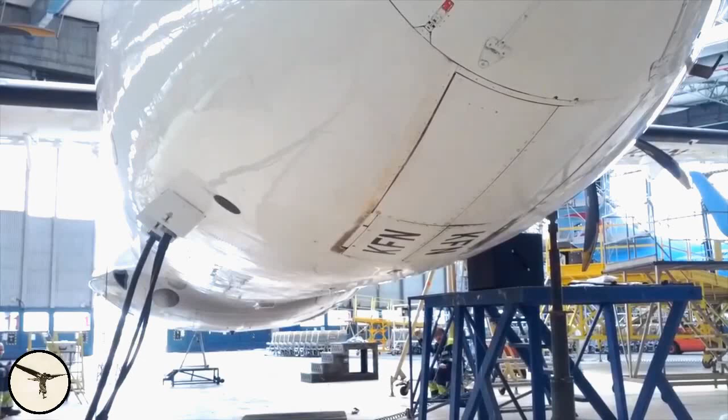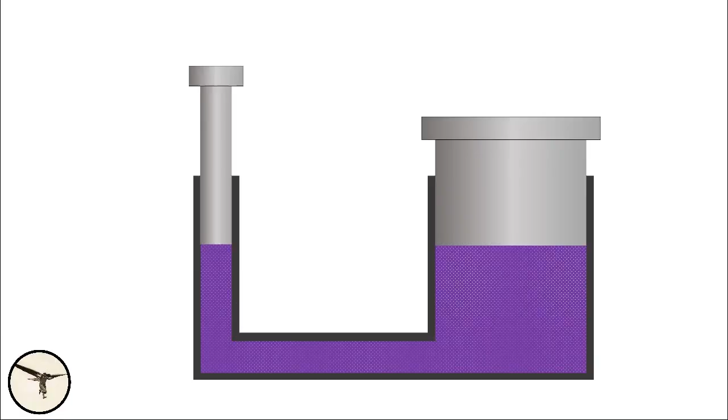Hydraulic power is used to operate many systems in airplanes. This animation shows the principle.

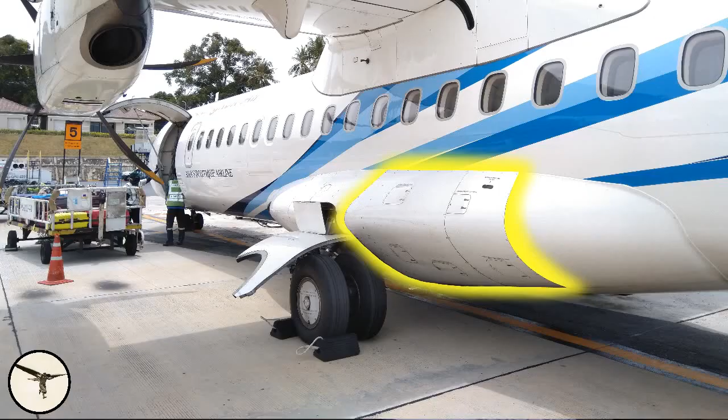But there is one little secret you may not know about, because it's not mentioned in the flight crew operating manual, so stay tuned. The hydraulic systems are located in the aft section of the left landing gear fairing. The pre-flight inspection consists of checking that the panel doors are closed, but we pilots like to open a hatch and check the level in the tank anyway.

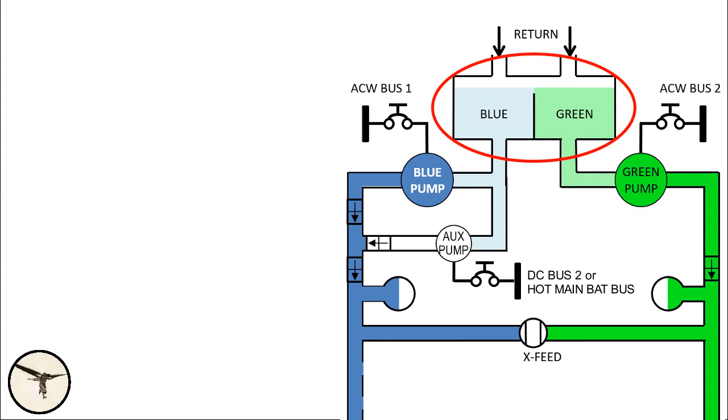The ATR has two hydraulic systems, and they are named blue and green. They share a common tank. Inside the tank there's a partition separating the blue and green systems. When the tank is full, the partition is below the surface. If there is a leak in one of the systems, the partition prevents the other system from draining out.

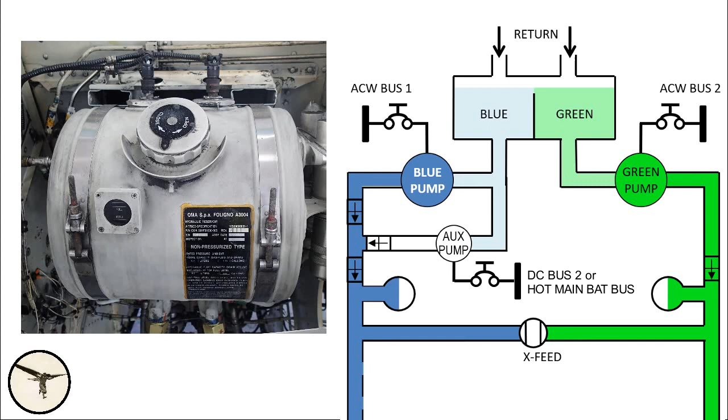The tank has a sighting window where you can measure the level of the hydraulic fluid. The color of the hydraulic fluid is not blue or green. We just use illustration with blue and green colors to distinguish between the systems.

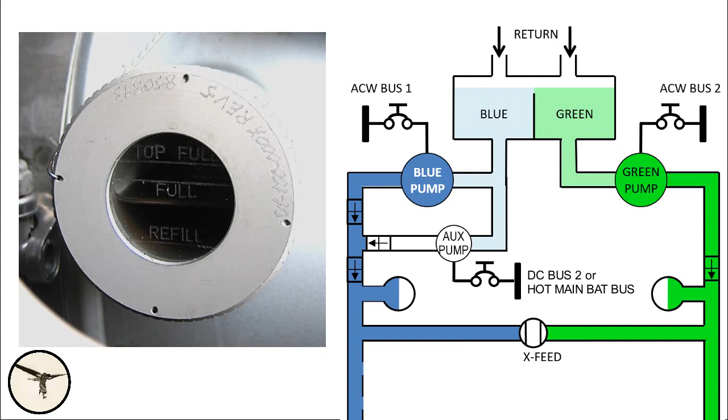Each system has a pump that pressurizes the fluid to 3000 psi. This is more than 200 times the atmospheric pressure. The pumps are running continuously when the engines are producing power. When the hydraulic fluid is not used to operate any of the systems, it is returned back to the tank.

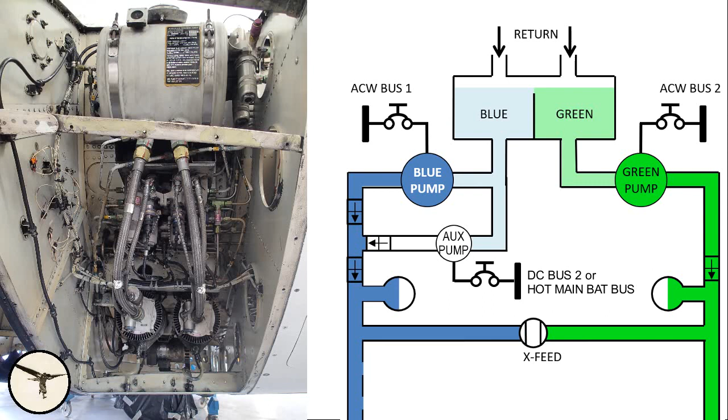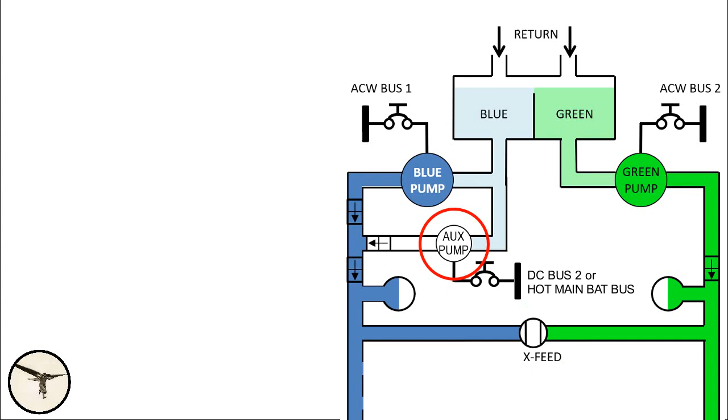A crossfeed valve can be opened to allow for one main pump to supply both systems. The blue system has a smaller auxiliary pump, which can be operated when the blue main pump is not powered.

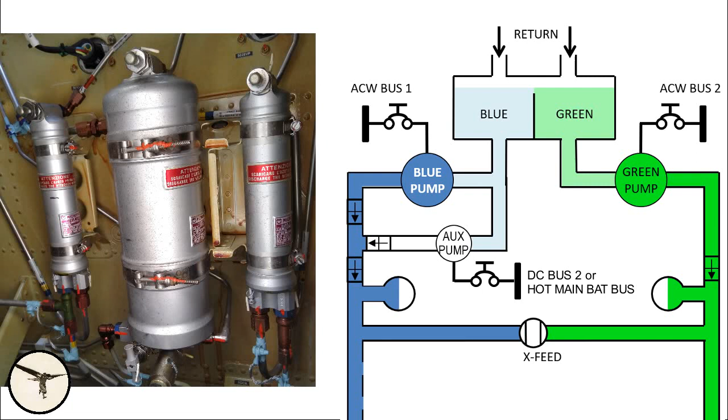Each hydraulic system has a small accumulator filled with nitrogen. They act as a shock absorber and prevent shock loads and damages to hydraulic lines and connections. The accumulators are the small bottles on the picture. The large bottle is for a parking brake accumulator. I will come back to that soon. The accumulators have mechanical pressure indicators, which can be viewed from the outside.

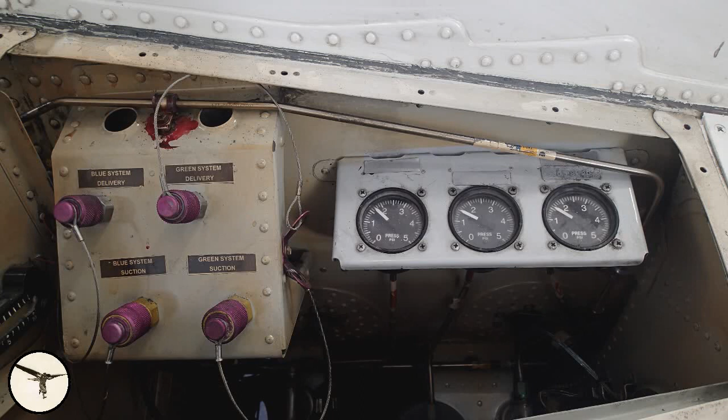The hydraulic system can also be connected to an external source. Those connections are to the left on the picture.

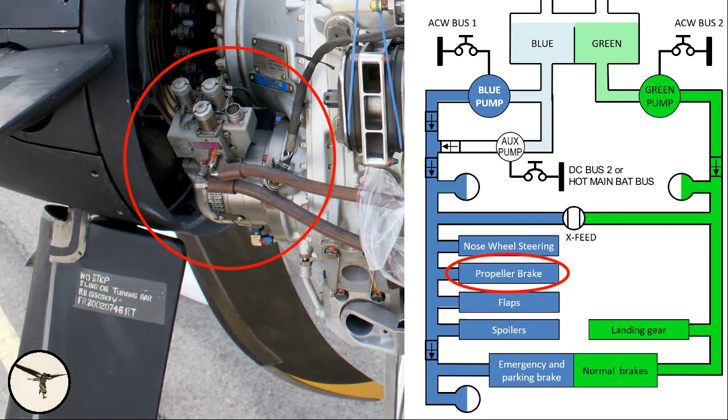The blue system supplies the following systems: the nose wheel steering, the propeller brake on engine number 2. The propeller brake is attached to the propeller gearbox, and when it's engaged, the propeller cannot move, and the engine can be run and supply electric power and air conditioning, just like an APU.

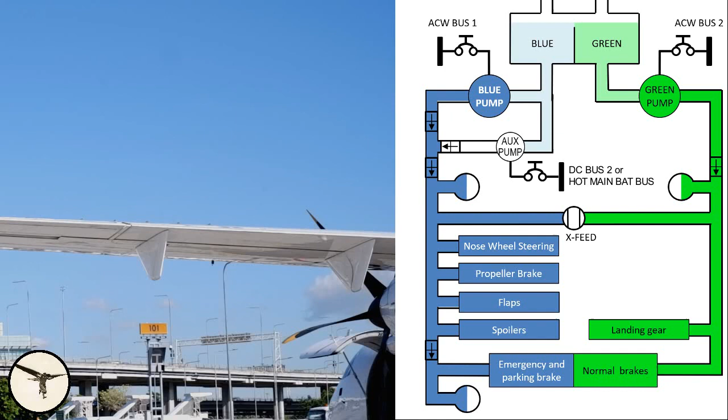Flaps, spoilers, they are used to assist the ailerons. The emergency and parking brake.

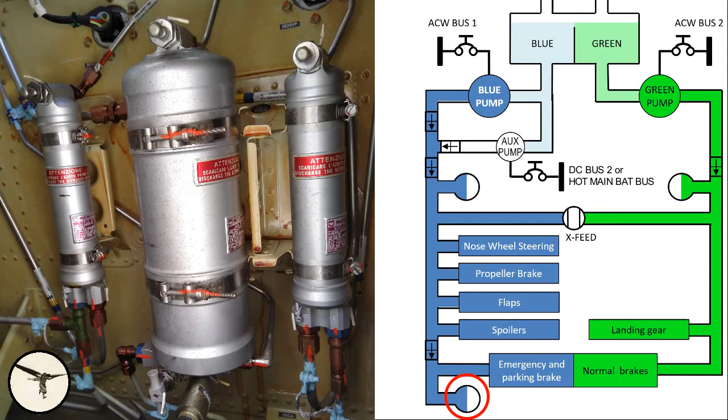The brake is connected to an accumulator that stores enough pressure to allow for 6 applications of the emergency brake. Therefore, you can land without hydraulic power and still be able to stop. The brake accumulator is the large bottle on the picture.

And just to clarify, when I later on say parking brake or emergency brake, I mean both, because the emergency brake is the parking brake set to the emergency position.

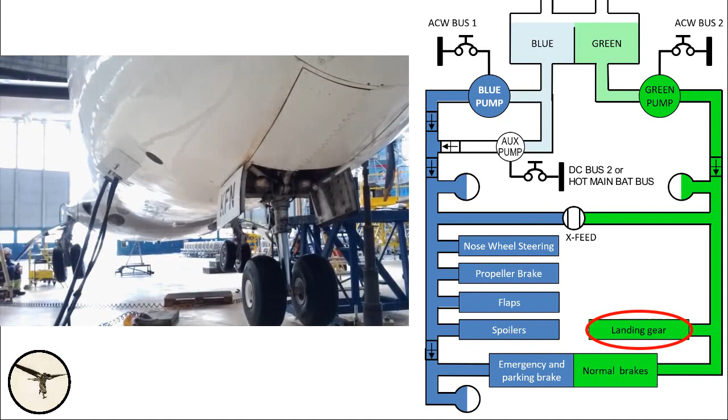The green system supplies the following systems: landing gear retraction and extension, normal brakes.

The hydraulic pumps are powered by electric power. The electrical system is described in a separate video. You will find a link below.

The main pumps are powered by AC wild frequency, called ACW, electrical power. The blue pump is powered by ACW bus 1 and the green pump is powered by ACW bus 2. The layout of the overhead panel shows the connection clearly.

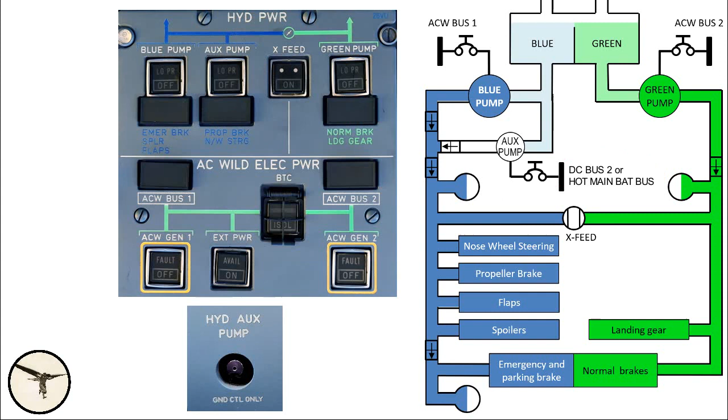The auxiliary pump is powered by DC bus 2 or directly by the hot main battery bus, which means it can be powered even when the battery switch is off. The auxiliary pump can be activated manually by pressing a push button on the pedestal.

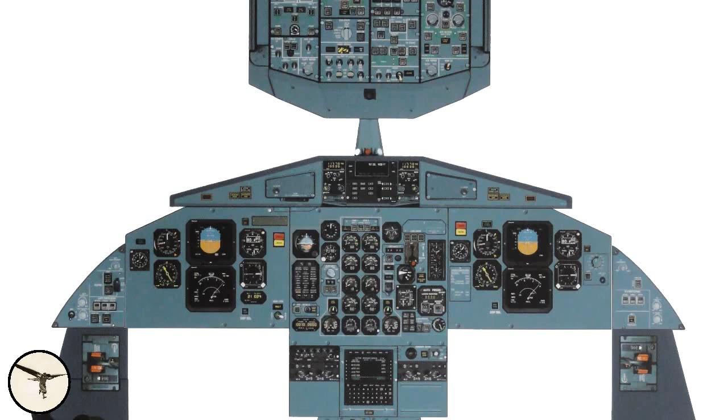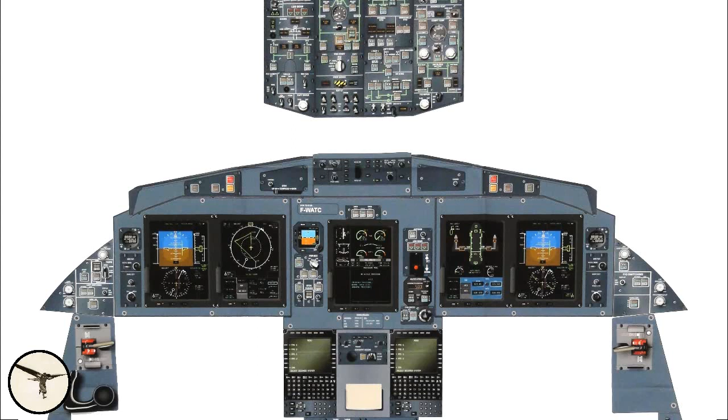ATR has two different cockpit layouts: the EFIS cockpit, also called Legacy, and the new glass cockpit, which was introduced with the 600 variants. Therefore, the indications differ between the variants. Both share the same hydraulic control panel on the overhead panel. It consists of 4 push buttons and 3 windows with alert lights.

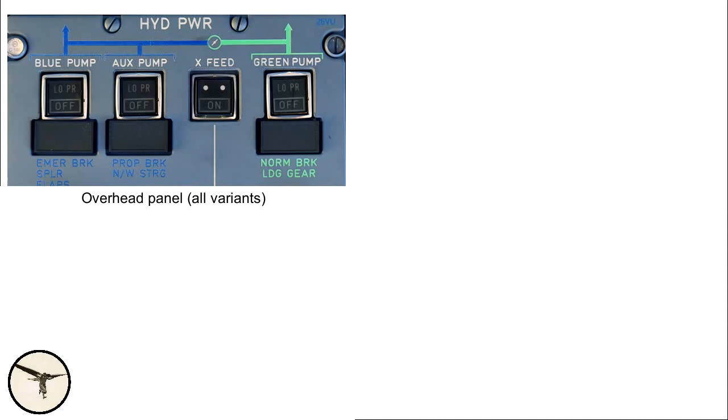On ATR variants with EFIS cockpit, there are 3 pressure indicators on the central instrument panel. On the top is the pressure for the emergency and parking brake accumulator. Down to the left is the pressure in the blue system, and to the right is the pressure in the green system.

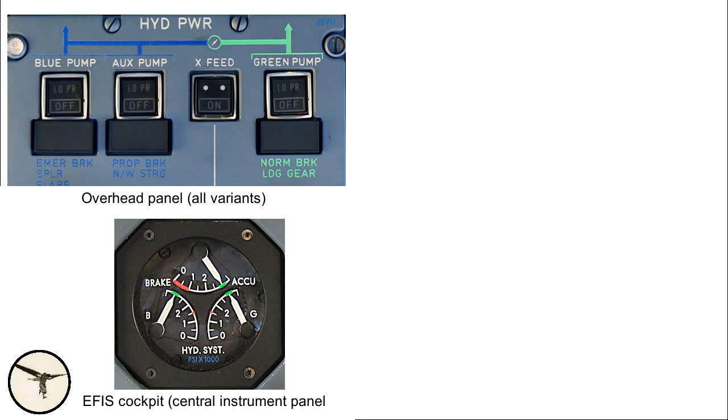On ATR variants with glass cockpit, the hydraulic system is shown on one of the system pages on the multifunction display, together with the AC and DC electrical system. Here the connection between the pumps and the electrical power sources are clearly shown.

Let's have a look at some scenarios. During normal operation, the pumps are on and the overhead panel is dark. The main pumps are running and the auxiliary pump is in standby mode.

When you switch the pumps off, the pressure in the affected system will go to 0. However, the pressure in the emergency brake accumulator is not affected.

Here is what it looks like when the aircraft is parked on the ground and we are preparing for departure. An amber low pressure light inside the push button illuminates when the pressure from the pump is less than 1500 psi.

That means that the pump had failed, or in this case it's not powered. The auxiliary pump low pressure light is not illuminated because it's in standby mode. After a few days on the ground, the emergency brake accumulator may have lost some pressure.

To power the blue system and charge the emergency brake accumulator, we press the hydraulic auxiliary pump push button on the pedestal, and the auxiliary pump will run for 30 seconds. This enables us to operate the propeller brake as well.

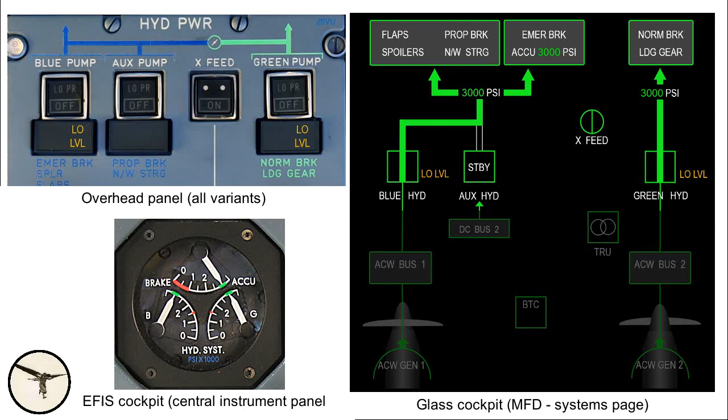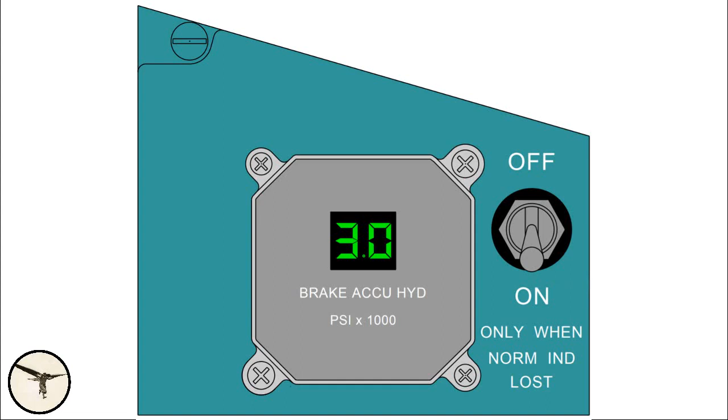In addition, models with glass cockpit have a parking brake accumulator pressure indicator on the left maintenance panel. It is intended to be used when normal indication is not available.

As mentioned earlier, the auxiliary pump is backup for the main blue pump. In normal operation, the auxiliary pump is in standby mode. When powered by DC bus 2, it will run automatically when the following conditions are met.

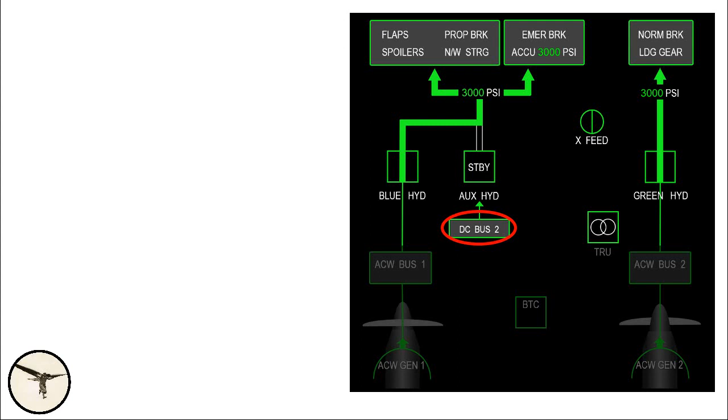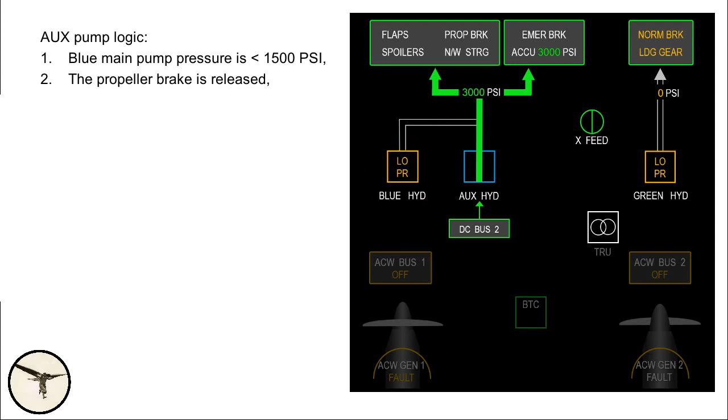1. Blue main pump pressure is less than 1500 psi. 2. The propeller brake is released. 3. The landing gear is selected down. And 4. At least one engine is running.

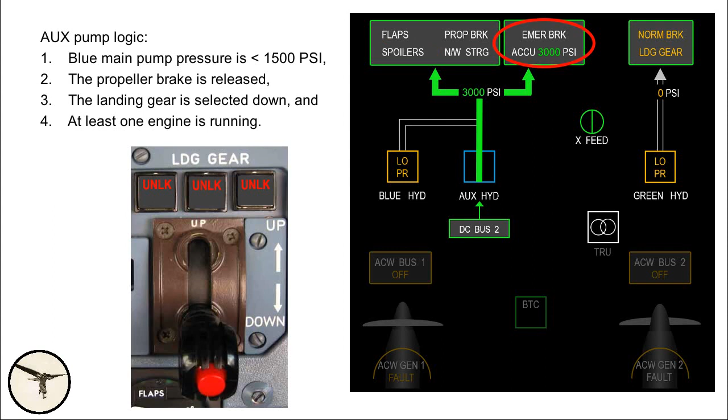That means if you have lost both main hydraulic pumps in flight, the auxiliary pump will start to run automatically when you select the landing gear down. This enables you to use the flaps, the spoilers, the nose steering and the emergency brake, which are needed for approach and landing only.

The green hydraulic system does not have an auxiliary pump. It is not necessary. The landing gear can be lowered with an emergency procedure, which is by gravity, and the normal brake is backed up by the emergency brake. You just need a longer runway.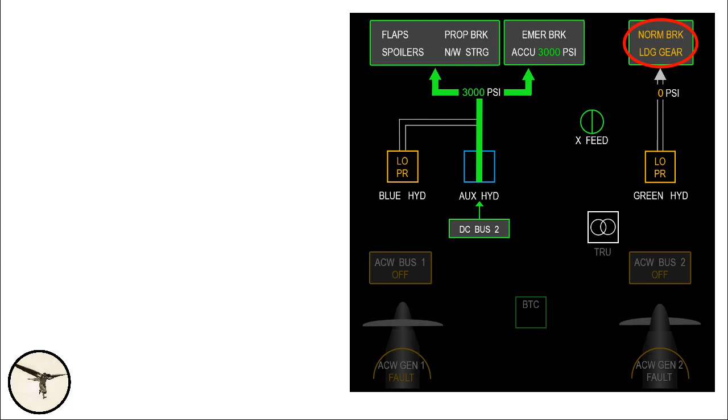The hydraulic auxiliary pump push button on the pedestal is used to activate the auxiliary pump manually. This time the pump is powered by either DC bus 2 or, if that bus is not energized, by the hot main battery bus, even when the battery switch is off. This is practical if you need to charge the parking brake accumulator, for example, after towing the aircraft.

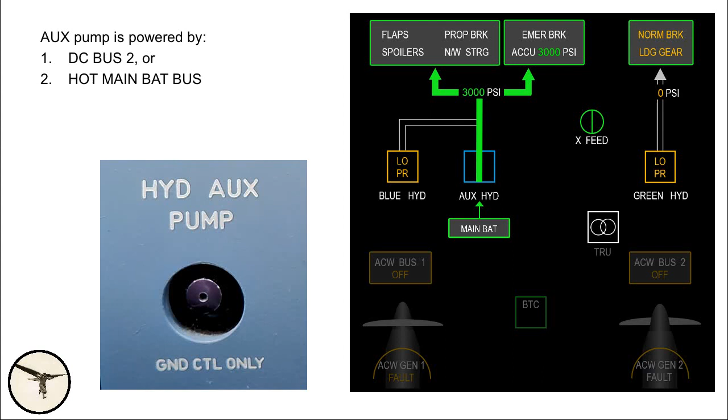When the battery switch is off, the pump runs as long as the push button is pressed. When the battery switch is on, the pump runs for 30 seconds after you have pressed the button. As you can read on the pedestal, it says that the push button is for ground control only.

This is correct for early ATR variants, but on later variants such as the 500 and the 600, the auxiliary pump can be operated in flight. Some ATR pilots may not be aware of this because it's not written in the flight crew operating manual.

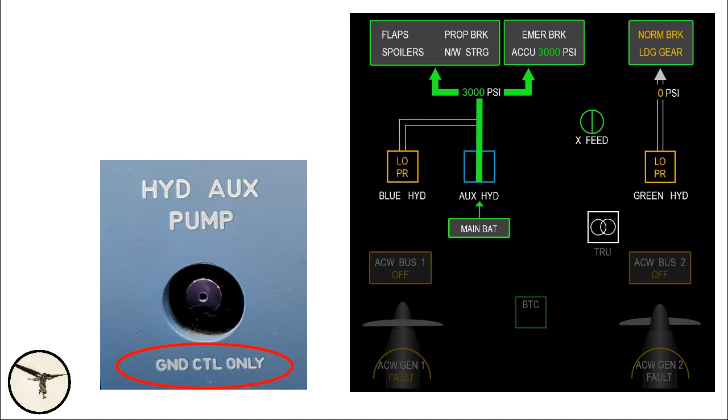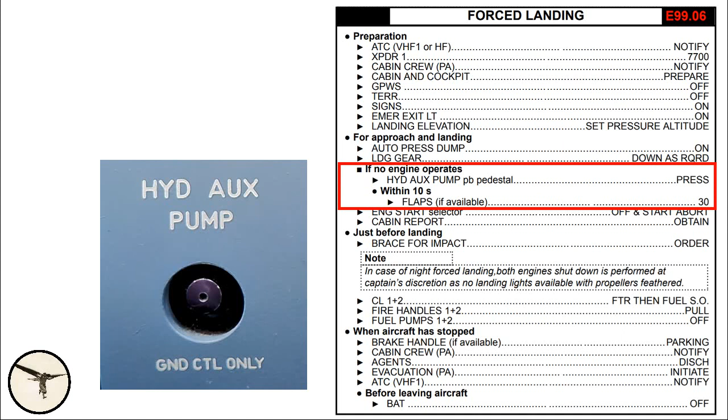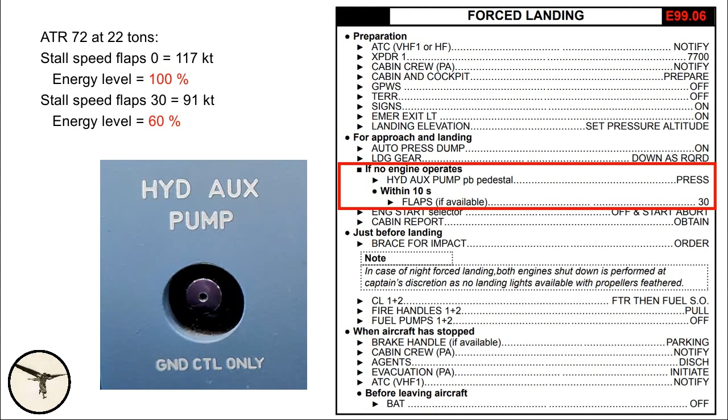But if you open a quick reference handbook and read the procedure for forced landing and ditching, you will see that the push button is activated to allow for the flaps to be extended. This is very important because the flaps in landing configuration reduce the stall speed so much that the kinetic energy of the airplane is reduced by 40%.

That's all for this time.